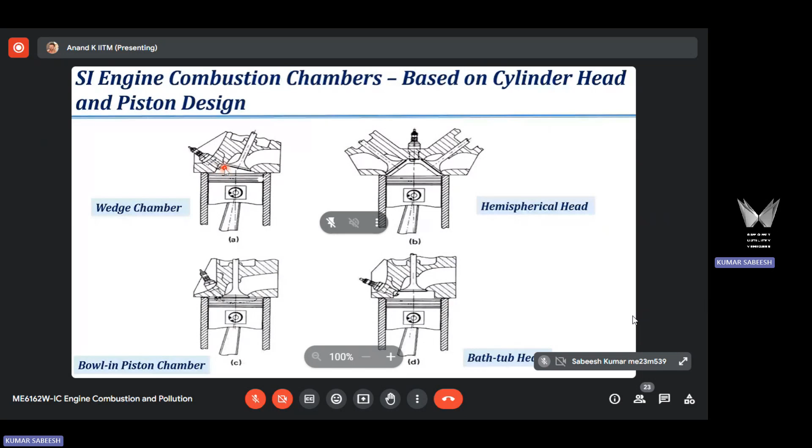Wedge-shaped combustion chamber with spark plug located at the center of the effective combustion space. Wedge-shaped combustion chamber, we already discussed in the combustion chamber types; that is one of the types based on the cylinder head shape. This is generally used in V-type engines. You see here that the spark plug is located at the effective combustion space, which is a space where the volume is more, so the flame has access to most of the charge in this region.

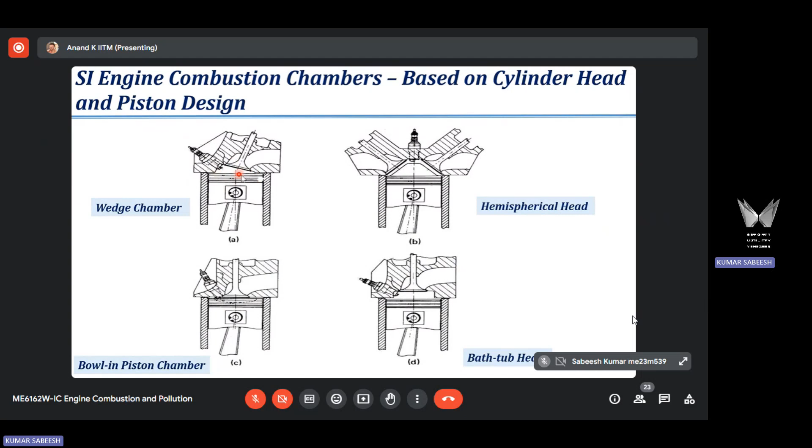And this is an end-gas region. So since the question is about knocking tendency, we should think about end-gas, whether this design will increase end-gas temperature or not, whether the flame will reach end-gas quickly or not. This is what you need to think to answer that question.

The second question is about arranging the following 4 types of combustion chambers in the increasing order of knock producing tendency. These 4 types of combustion chambers, as we know, are based on the location of the valves, intake and exhaust valve. Based on the change in the location of intake and exhaust valves, you have these 4 types of combustion chambers. You have to arrange them in the increasing order of knock producing tendency, meaning the one that produces least knock should come in the beginning, and the one that produces highest knock should come at the end.

The other 2 will come in between. So it is like increasing order of knock producing tendency. First make the arrangement and then justify your arrangement with valid reason, meaning you have to write the reasons why you have arranged so.

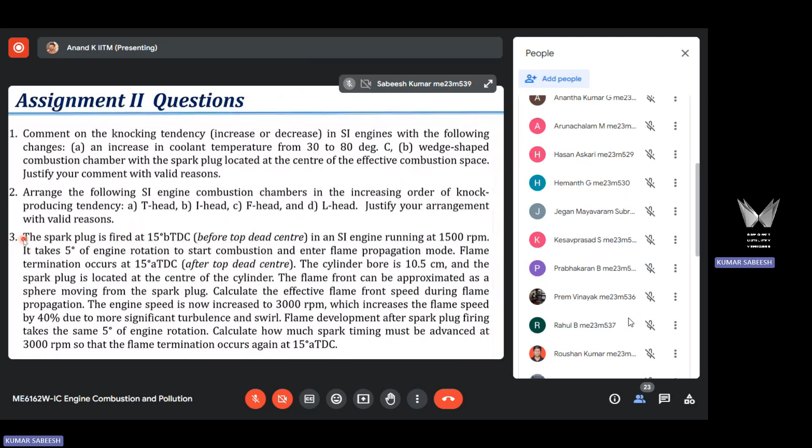Okay, thank you. So now we are moving to question number 3. There's a simple numerical problem. I'll first read the problem and then discuss the solution.

The spark plug is fired at 15 degree BTDC, before top dead center. Always note that when we do combustion analysis, compression TDC is a reference point. Piston reaches TDC two times in an engine cycle in a 4-stroke engine. Our analysis is with respect to piston at the TDC point during the end of compression stroke.

So here, spark plug is fired at 15 degree BTDC. What is this information? It's 15 degree before TDC, sir, like advance. So this information is the spark timing, right? Timing of spark discharge is given as 15 degree BTDC in an SI engine running at 1500 RPM.

This is the engine running speed. It takes 5 degree of engine rotation to start combustion. What is this information, 5 degree? The crank angle time, ignition delay. More precisely, what is that called as? First stage of combustion, right? What is that called as? Flame development phase, yes, flame development period.

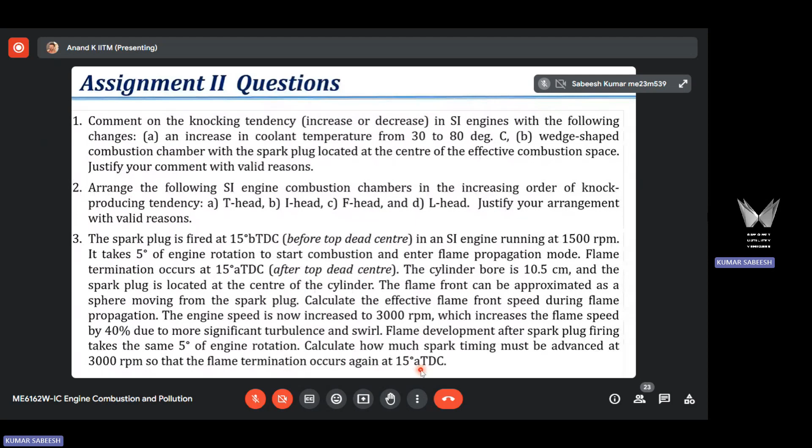So what I will do is write the data. The information given to you: let us consider case 1. Spark timing is equal to 15 degrees before top dead center. Engine running speed is given as 1500 RPM.

Flame development period is given, FDP, which I'm writing as flame development period. This is 5 degrees crank angle. Flame termination, abbreviated FT, flame termination time, is 15 degrees ATDC, which is after top dead center.

Cylinder bore is given, I'm writing it with capital D. Cylinder bore is 10.5 centimeters. Spark plug is at the center of the combustion chamber, so this is the axis, and the spark plug is located here.

It can be offset also in a given problem, but it is mentioned that the spark plug is at the effective center of the combustion chamber. So here the flame is developed, and from here it starts to move across the combustion chamber. The diameter or bore of the cylinder is given in the problem, and with this information, the flame front is approximated as a sphere moving from the spark plug location. With this information, you are asked to find the effective flame front speed.

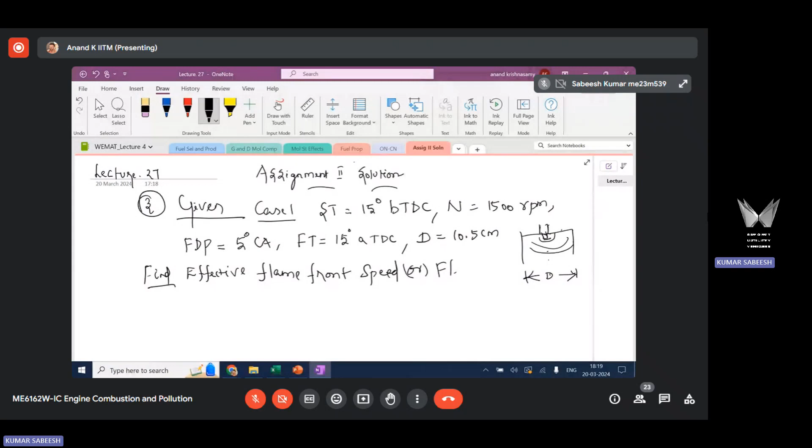So this is speed, or you can say flame velocity. We have already discussed that the overall combustion event in SI engine is based on how the flame moves, because the rate of burning is dependent on the rate at which the flame moves.

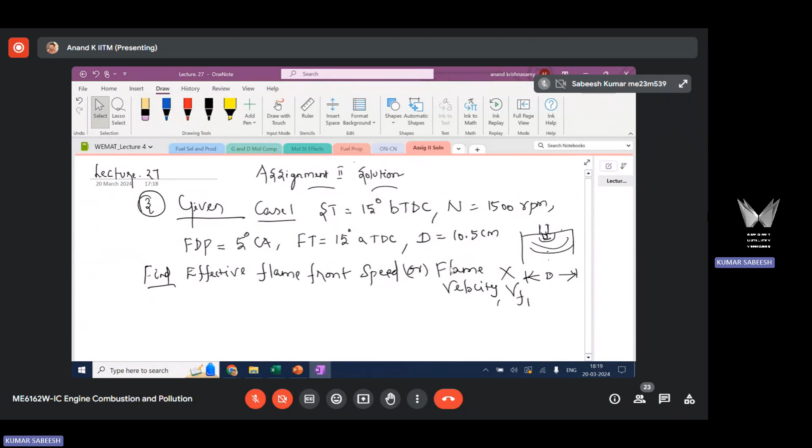Flame velocity carries a lot of significance in SI engine combustion. We need to find or track the velocity of the flame, because this is going to decide the rate of burning of the fuel-air mixture. Let us say this is VF1, which is what is asked in the problem. Now, to get velocity, go to the fundamental definition. What information do you need to get the velocity of the flame?

Slope of the curve, sir, in that way. No, go to the fundamental definition. Velocity, velocity, how will you define it? We need distance and time, sir.

Yes, so we need time from the crank angle, from the start of flame propagation to the end, and we also have the range. Exactly, so we need velocity, and we are going by the fundamental definition. What information do we need? Two pieces of information: one is distance traveled by the flame, and what is the maximum distance traveled during the flame propagation, and what is the associated time taken for traveling this distance? These two fundamental pieces of information I need to get this unknown flame velocity.

Now, how do I find the distance traveled by the flame? Based on the given information, what is the distance traveled? When the flame develops, it develops at the spark plug location. There is flame development here. It takes 5 degree crank angle time for developing the flame. Once it gets developed, it starts to propagate evenly across the combustion chamber.

Now what will be the maximum distance moved by the flame? The tangent of that sphere will be touching the piston top. So can I say that it is d by 2? It is moving evenly on both sides. So max distance will then be d by 2, right? Yes.

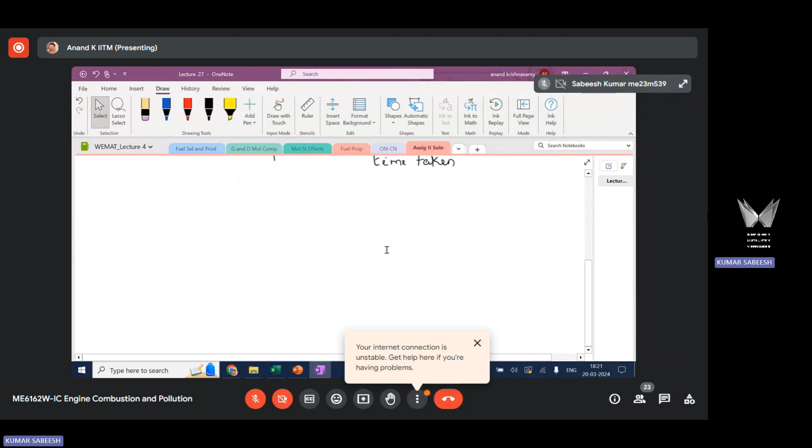So distance traveled is now known. How will you get the time taken? Please note that theta, the total angle, is given. This is the SI unit — we need flame speed, so we have to convert theta. This is in meters, time taken should be in seconds. And the given information is...

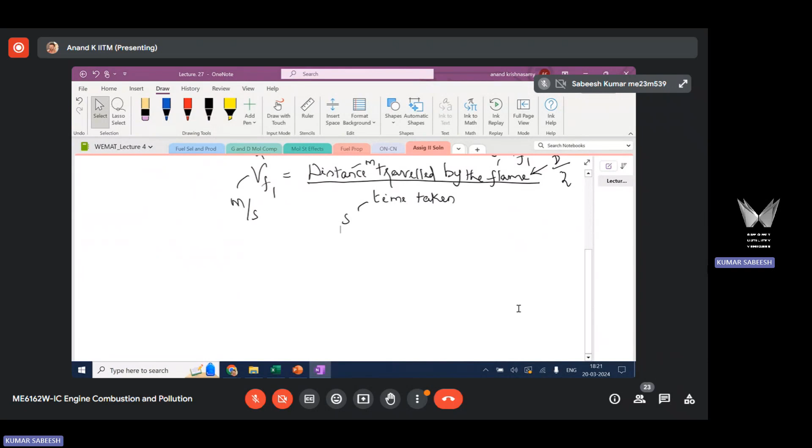Spark timing is known to me. Spark timing is 15 degrees. Reference point is 0 degree, which is compression TDC. This is before TDC, in this direction. If you move in this direction, it is before TDC; in this direction, it is after TDC. This is my reference point. Spark timing is 15 degree BTDC, before TDC.

It takes 5 degree to develop the flame. So this duration is 5 degree crank angle, the flame development period. So what will be this angle then? 10 degrees, sir — 10 degree. So this is 10 degree, where the flame propagation starts.

Now, when does the flame terminate? That is given in the problem. This is 15 degree after TDC, where the flame terminates. So this is the point of flame termination.

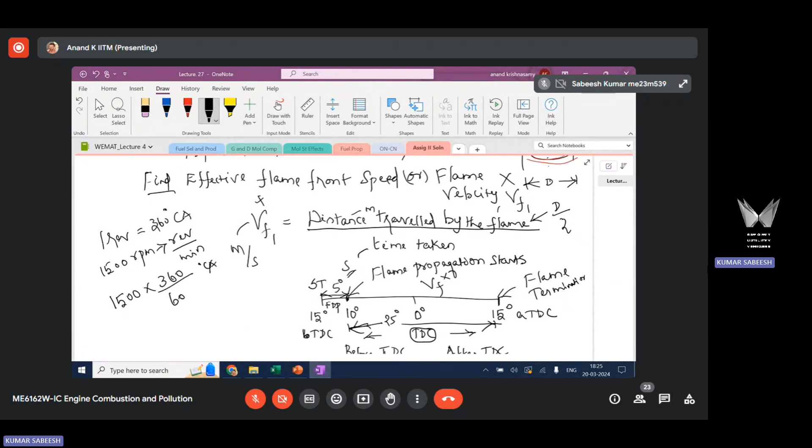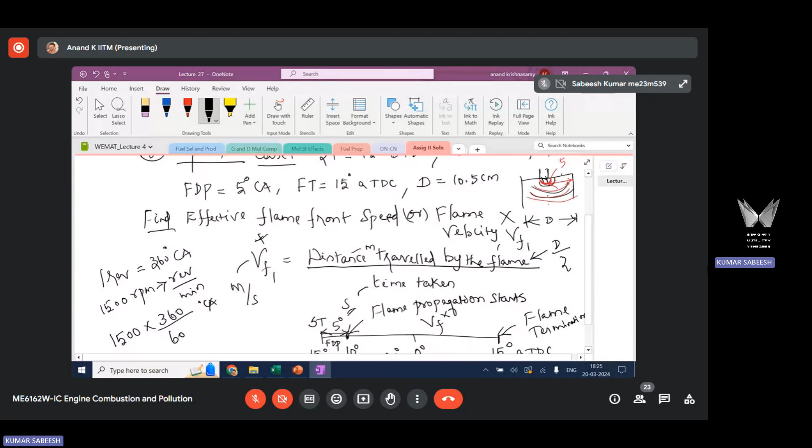Yes sir, so this is the total angle in 1 second. From this you can convert angle into time in seconds. So you need to do that conversion. Substitute here and you should be able to get VF1. This is for case 1. Case 2.

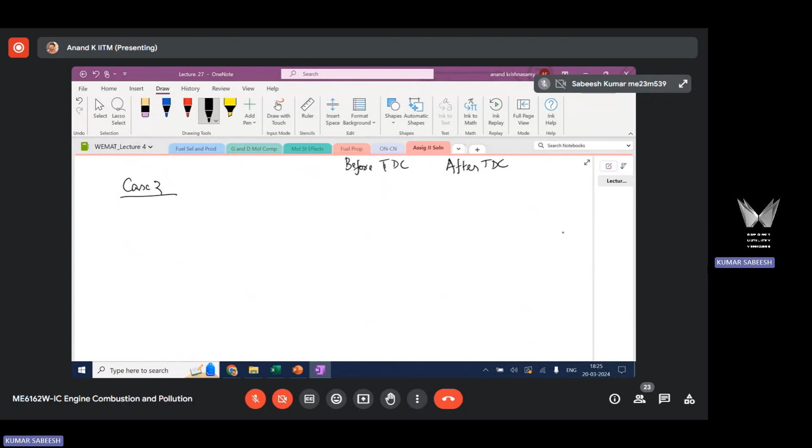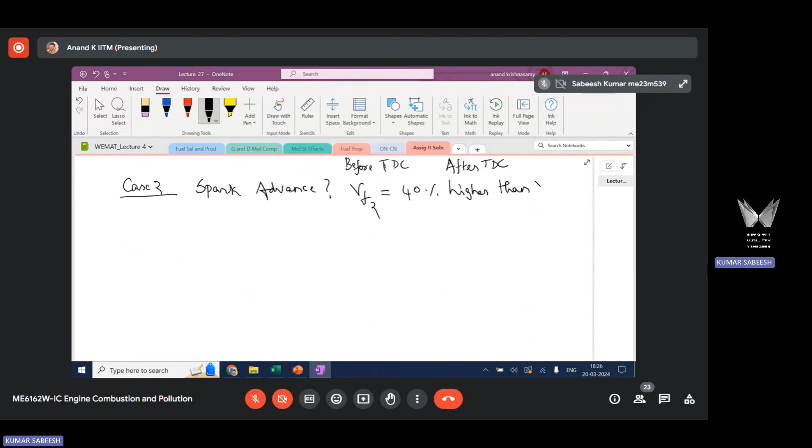Let us write the information given. For case 2, you are asked to find the spark advance. The information given is that flame velocity is 40% higher than VF1. What does that mean, 40% higher than VF1? It means 1.4 times VF1. So this is known to me now, since VF1 was obtained from the previous case.

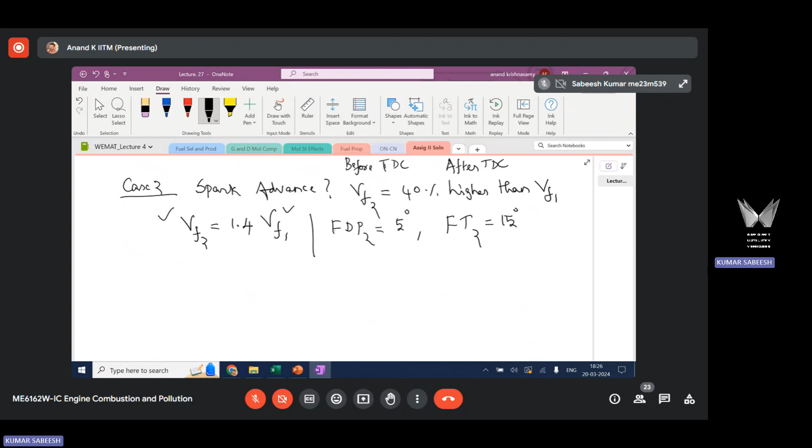Other information given is that it takes the same 5 degrees for flame development, same as the previous one. And the flame termination for case 2 is again at 15 degrees ATDC. So these are the informations given to me now.

So this is on the time bar. This is flame termination for case 2. This is 0 degree, which is TDC, and this is 15 degrees ATDC. The 5 degree flame development period is for case 2. What I don't know is the spark timing, ST, for case 2 - this is what I need to find. This is 5 degrees, known to me.

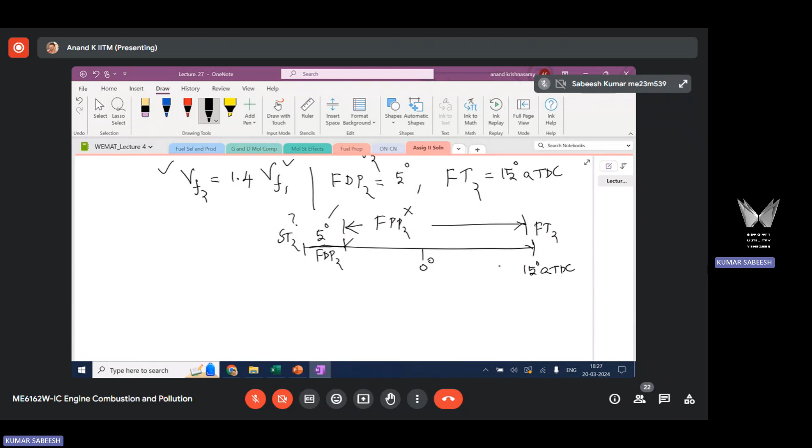Now the flame propagation starts here and ends here, so this period is the flame propagation period. Let us say this is FPP for case 2. Until you get this, you are not going to get the spark timing. How will you get the flame propagation period for case 2?

Sir, I have R, which is the maximum distance that is going to travel, and I've got the flame propagation velocity - this is known to me. This equals D by 2, which is not going to change, divided by time.

So this is known, this is known, you can get time in seconds. Did you get what I am saying? Right sir. Now you need to convert that into angle, into degree crank angle. Once you get this, this information will be known to you in degree crank angle.

Once you know this information, you can track this point, and add to that this 5 degrees. From that you will be able to get the spark timing for case 2, and compare that with case 1 to say how much the spark timing is advanced. Clear? Clear, sir.

Question number 4. In this question, you are asked to write and briefly explain any 2 engine variables that influence the premix combustion phase and the diffusion combustion phase in a CI engine.

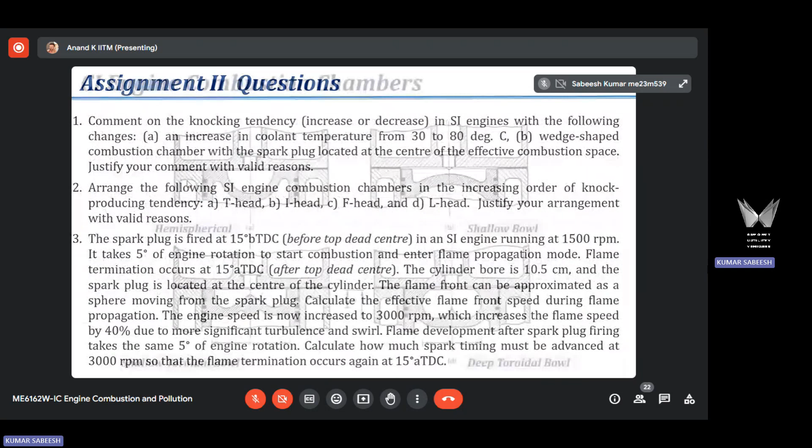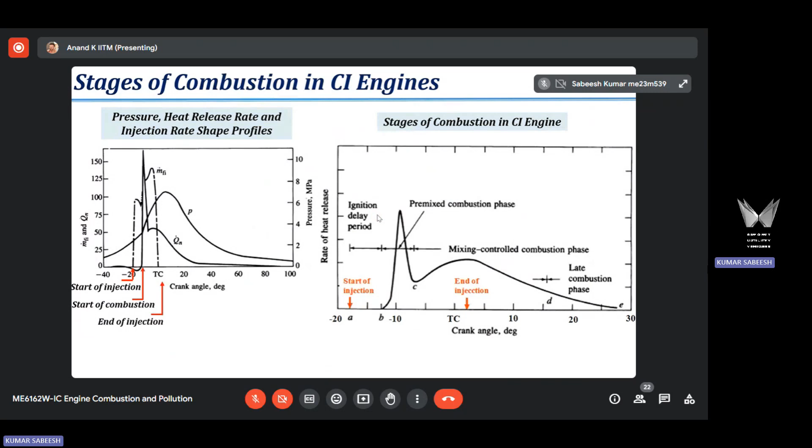The peak pressure will be different, sir. Peak pressure will be different. So this is a heat release profile for a CI engine. You are asked to draw this heat release rate profile for no load condition and full load condition. What will happen to the ignition delay time at no load and full load? Sir, ignition delay time will be more in the no load condition compared to the full load condition, because conditions are favorable for lesser delay time in the full load condition. Okay.

So you should first check what will happen to delay, which is the first stage of combustion - what will happen to delay time at no load and full load? These are the conditions given. So for no load, the duration of delay time depends on the in-cylinder pressure and temperature condition. What will be the pressure and temperature? Let us say this is P1 and T1, and this one is P2 and T2. In a relative sense, what will be the pressure and temperature value at no load and full load? P1, T1 will be lesser than P2, T2 - this will be less, this will be more.

This is no load, you burn less fuel, so in-cylinder pressure and temperature are lower. At full load, you burn more fuel, so in-cylinder pressure and temperature will be high. So in a relative sense, this pressure and temperature is taken at the time of fuel spray. When you spray fuel into the engine cylinder, the in-cylinder conditions we are taking as P, T. I'm talking about these conditions - I have indicated that as P1, T1 and P2, T2 at the time of fuel injection.

When in-cylinder pressure and temperature are higher, the delay time is going to be shorter. Overall delay time is physical delay plus chemical delay. Chemical delay is based on composition and is also sensitive to temperature. Physical delay is based on how quickly you get an ignitable mixture, and this depends on in-cylinder pressure and temperature conditions. When pressure and temperature are high, you get a shorter overall delay because there is a shorter premix, shorter physical delay, and shorter chemical delay. Overall delay time comes down when pressure and temperature are high.

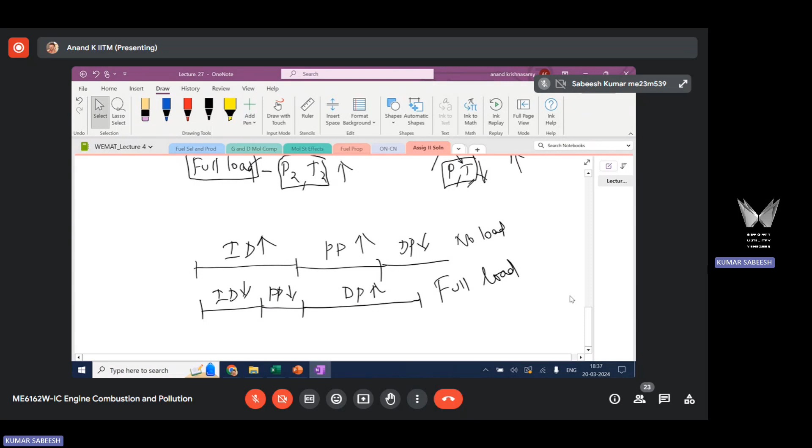So this is at no load, and this is at full load. Is it clear? Yes sir, clear sir, clear sir. Okay.

Question number 6: comment on the ignition delay increase or decrease in a typical CI engine with the following changes - fuel injection timing varied from 10 to 30 degree before top dead center, and piston bowl shape modified from flat geometry to deep toroidal. So there are two parts of this question. One is change in injection timing.

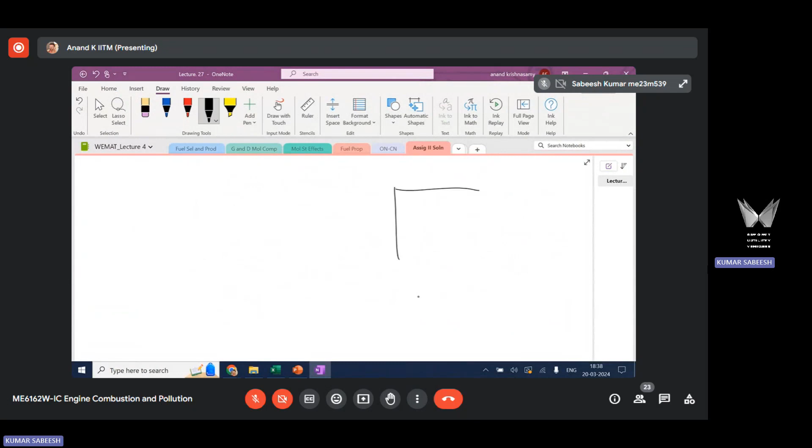So you have two different injection timings. One is 30 degree before TDC, let us say this is the TDC point. The other one is 10 degree before TDC. So you are injecting fuel at 30 degree instead of 10 degree. The question is about commenting on the ignition delay when the fuel injection timing is varied from 10 to 30 degree. If you move from 10 degree to 30 degree, what will happen to the ignition delay time? Will the delay time increase or decrease?

Again, this depends on in-cylinder conditions. So you have one condition here, let's say P2, T2, and this is the initial condition, let's say P1, T1. If you move from here to here, you should think about the in-cylinder conditions, and accordingly the delay time will increase or decrease.

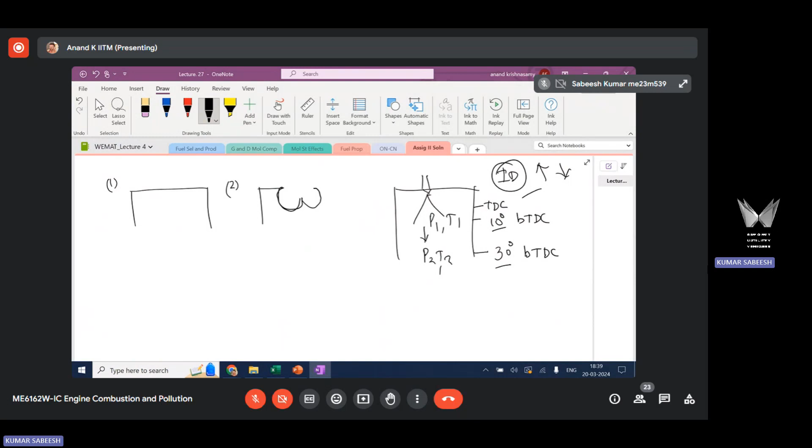The second part of the same question asks you to comment on ignition delay when the piston bowl shape is modified from flat geometry to deep toroidal geometry. So case 1, you have a flat piston like this. Case 2, you have a deep toroidal piston, which resembles the symbol omega.

This is flat, this is deep toroidal. You need to comment on what will happen to the ignition delay time because of the change in bowl shape from this to this. So what will change if you move from flat to deep toroidal? What effect will it have?

It will increase the turbulence and mixing. With the flat piston, you will generate some squish because of the piston's upward movement, but there is no swirl. In the second case, with the deep toroidal piston, you are going to create a squish and also a swirl because of the piston shape. So fuel-air mixing is going to be different in these two cases. Now you have to relate that with the ignition delay time - you have to comment on whether it will increase or decrease as you move from flat to deep toroidal.

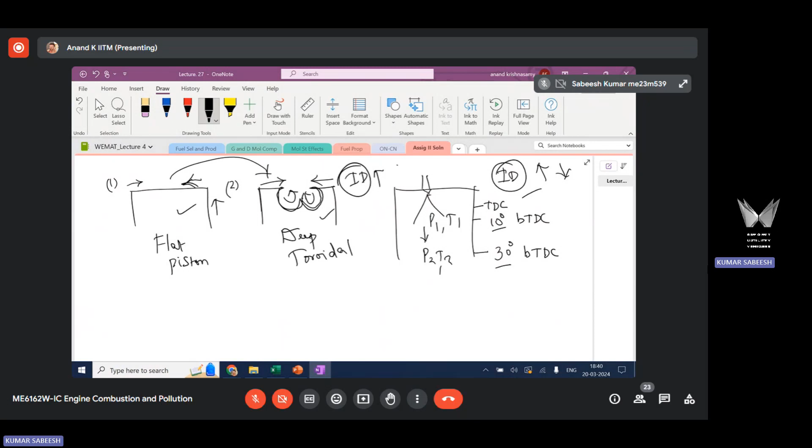The last question: arrange the following CI engine combustion chambers in the increasing order of squish producing tendency. Squish is a radial motion. You have 3 different combustion chambers: hemispherical, shallow bowl, and deep toroidal.

This is hemispherical, this is shallow bowl, this is deep toroidal. You have to arrange these 3 combustion chambers in the increasing order of squish producing tendency, meaning the one that produces least squish should come in the beginning, and the one that produces more intense squish should come at the end. You also have to comment on your arrangement, why you have arranged it like that. If you say a particular design increases squish, you have to justify why it increases squish.

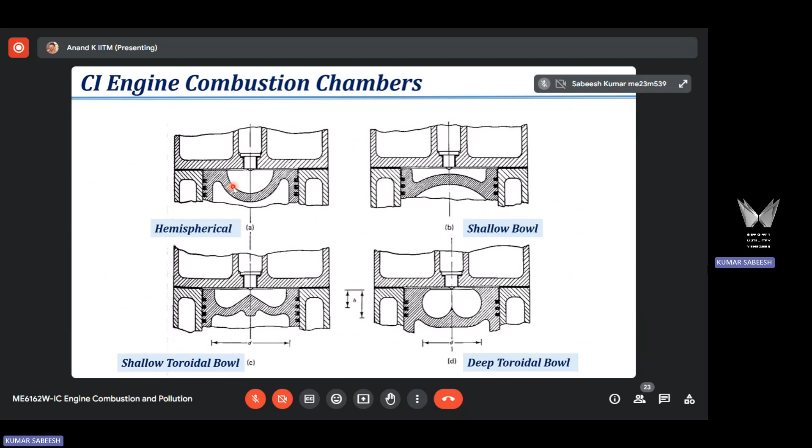Clear? Any questions? Are there any doubts? No sir, okay, there are no doubts, so I will move ahead. I assume that you got the solution key for this question.

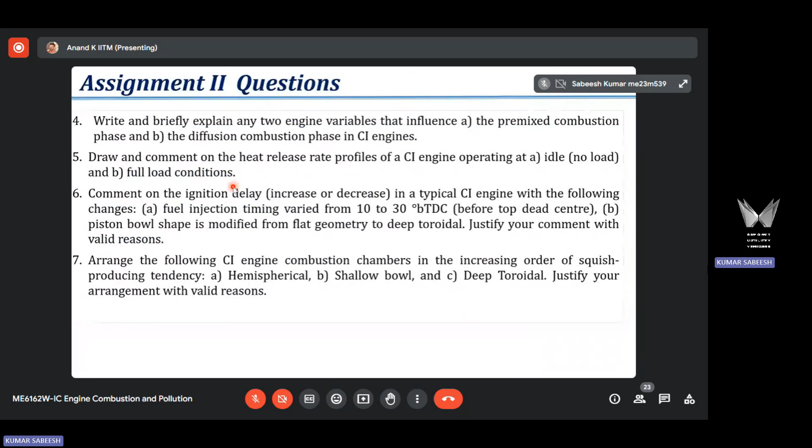Sir, just one question for quiz 2, the portion will be chapter 3 and 4, right? If I'm not wrong, what you have told. Only chapter 3? Quiz 2 you are asking? Quiz 2, yes sir. I didn't say anything about this. What I said is whatever we are going to discuss before the exam will be the syllabus for quiz 2. Right sir, thank you sir.

I think we should be able to complete chapter 4 also, maybe chapter 3 and 4, but I will just confirm. So your exam is on Saturday, right? Yes sir, this Saturday we have the exam. Ours is on 5th April, if I'm not wrong. That is next Saturday? No sir, 15 days after, 15 days. So I think we should be able to complete this. You may have to go through these 2 chapters. If there is any change, I will inform. I will confirm the syllabus anyway, well before the exam. Thank you sir.

So now we are moving to chapter 4. Chapter 3 on combustion is concluded. SI and CI engine combustion, we have now understood how the combustion event happens in a spark ignited engine and compression ignited engine. The next chapter is about instrumentation to study the combustion process in the engine. Having understood the combustion process, we need to know how to analyze this process in a given engine, SI or CI engine.

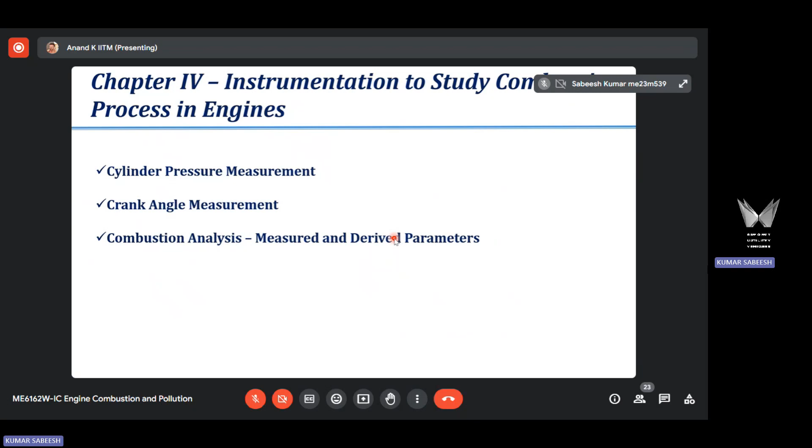So in this chapter, we are going to discuss the measurement principle followed to get the cylinder pressure, what instrument we use and what measurement principle is followed. Similarly, we will discuss what instrument we use to measure crank angle and what measurement principle is followed. With that information, I will also talk about how we can get other derived parameters by using this pressure and crank angle data. And that will help you analyze the combustion event in IC engine, both SI engine and CI engine.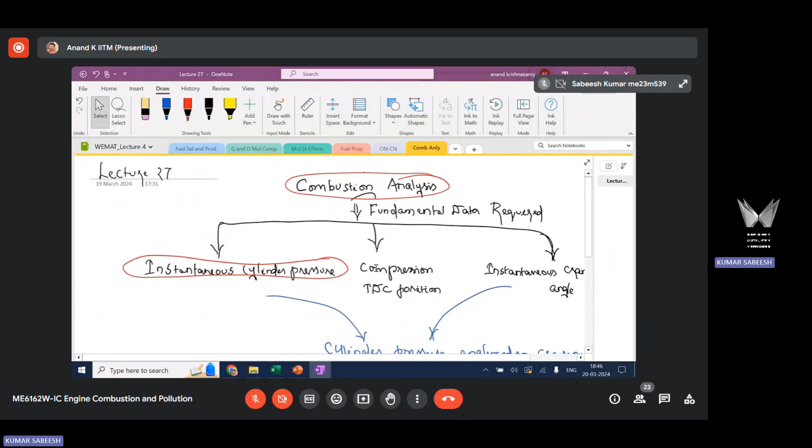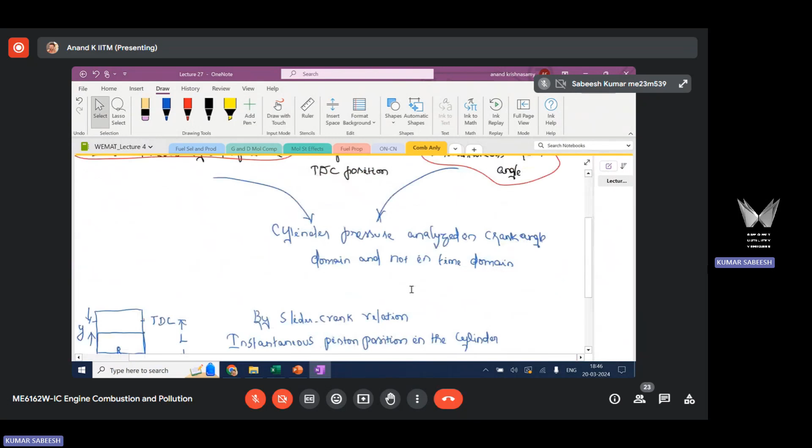The fundamental data required to analyze the combustion event is instantaneous cylinder pressure and instantaneous crank angle. What do we mean by instantaneous pressure and instantaneous angle? At that particular crank angle, at that time instant, we are talking about the pressure measured inside the cylinder, and the angle theta, which is the crankshaft angular position, measured at that same instant. This is instantaneous pressure and instantaneous angle.

Apart from this, you also need compression TDC position. When you say angle, you are counting that angle, and to count it you need a reference point. The reference point is always compression TDC position. Why compression TDC and not simply TDC? In a four-stroke cycle, the piston reaches TDC twice: once at the end of compression, and once at the end of exhaust. End of exhaust we are not bothered about, since combustion doesn't happen there. Combustion happens when the piston is at TDC at the end of compression, so that's why we take this as the reference point.

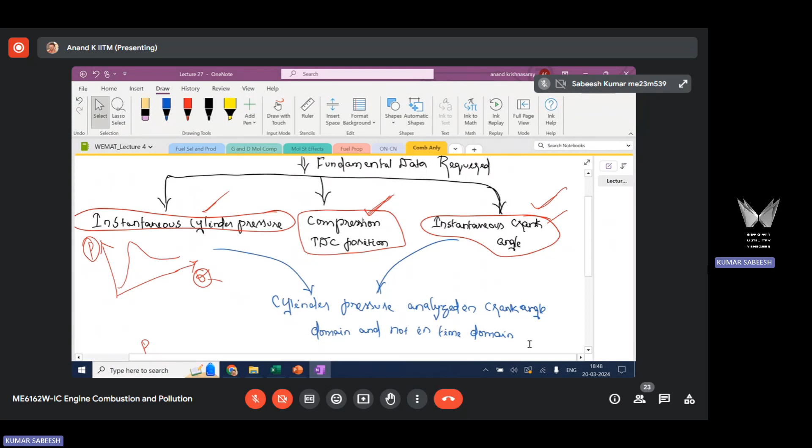So these three pieces of information you need to get precisely, and from this you obtain the pressure profile. This is one of the most useful and critical pieces of information needed to analyze the combustion event: instantaneous cylinder gas pressure, instantaneous angle, with this angle referenced with respect to compression TDC position. The other important point is that we analyze cylinder pressure in the crank angle domain, not in the time domain.

What do I mean by that? This is crank angle domain, and this is time domain, absolute time in absolute time units. We never analyze pressure variation with respect to absolute time, that is, time domain. We always analyze pressure variation with respect to crank angle variation. Why is it so? Because combustion is phased with respect to TDC, in an angle manner. So if the RPM increases, there is no relevance of time in that way — this becomes meaningless. If you analyze in-cylinder gas pressure variation in a time domain with respect to a particular time, this doesn't make any sense at all.

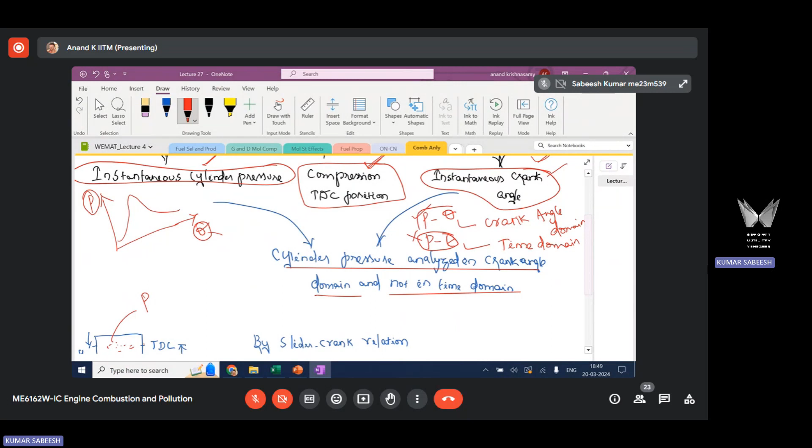This makes a lot of sense because when you analyze pressure with angle, this crankshaft angular position is related to the instantaneous piston position. These two are interrelated by the slider crank relation, because the engines we use are reciprocating engines, not rotary engines. IC engines, whatever we use currently, are not rotary. Rotary engines have very limited application — the Wankel engine is a rotary engine, but it has very limited application, it's a failure design.

This is what we use in a reciprocating engine: for any instantaneous crank angle, there is an associated piston position. The piston moves in linear up and down motion, and the crank undergoes rotational motion. These two are related through the slider crank relation. Meaning, if I relate pressure with angle, this angle can be related to piston position — linear piston position. So I am analyzing how the gas pressure varies in the cylinder with respect to the position of the piston. When I analyze in the P-theta domain, I am analyzing how pressure varies with respect to piston position, which gives me information about the piston position.

So when I say the pressure value is this much, this is related to the piston position. This makes a lot of sense because, ideally, at the start of the expansion stroke we want maximum pressure in the cylinder so that we can extract maximum work from the gas. Expansion stroke is the only stroke where work is done by the gas — it's positive work. During the rest of the time, the piston provides work to the working fluid, which is negative work. Only during expansion is it positive work. So we are analyzing pressure variation with respect to piston position.

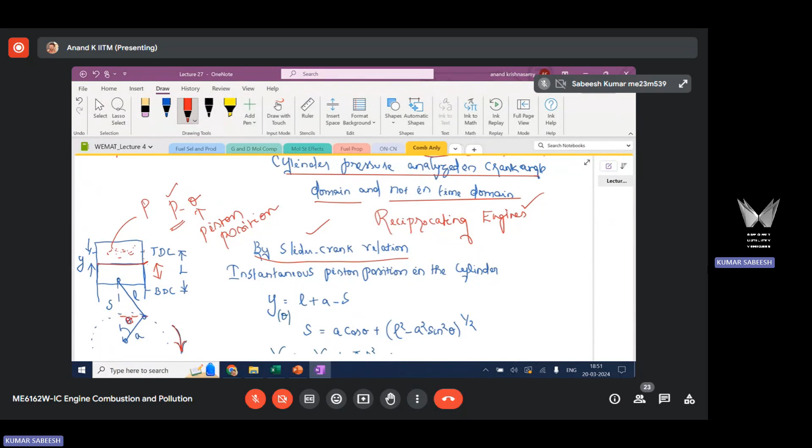This makes a lot of sense, and with theta, crankshaft angular position, you can always relate that to the linear position of the piston by the slider crank relation shown here. Y theta, the instantaneous piston position, is equal to L plus A minus S. L is the length of the connecting rod, and A is the crank arm length.

A is this, this is L, and this is S. S is the distance from here to here. This is L, connecting rod length, and A is the crank arm length. Y theta is any position, any linear or instantaneous position of the piston, that can be obtained from L plus A minus S.

What will be the value of S when the piston is at TDC? At TDC, S will be L plus A, so Y theta will be zero. When the piston starts to move down, it cannot move up, that is a dead center. When it starts moving down from TDC, S will decrease from L plus A.

The decrease in S from L plus A is a measure of Y, the instantaneous piston position. So this relation relates the linear position of the piston with respect to S, and S can be related to angle, crankshaft angle. This distance from here to here, S, can be obtained from this triangle. This distance will be the summation of this and this.

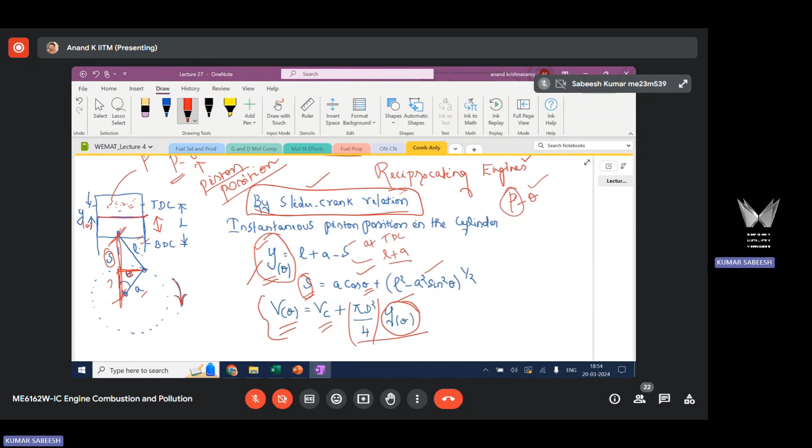So the fundamental data you need to acquire are cylinder pressure at any point of time in the angle domain, instantaneous angle, and compression TDC. With this information, you'll be able to get this profile. Once you get the profile, you'll be able to derive all other combustion parameters from this information. I will talk about that in the next class. First, I will talk about how we can get pressure measurement done and instantaneous angle measurement done, and how we can get compression TDC. After that, I will talk about how we can derive other parameters from the pressure profile.

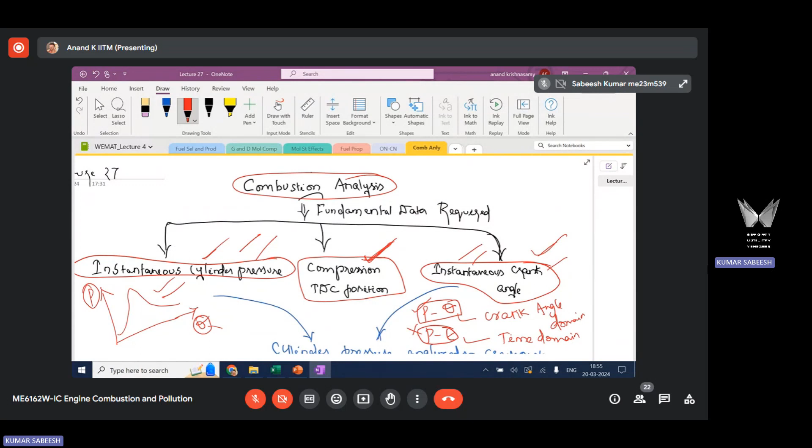Okay, regarding the assignment that you have told us to submit by 1st of April, yes, the theoretical question that has been asked, basically, as you have been saying, conceptual lines which are the gist of thoughts that we are willing to express, that is more than enough, no vast answer and something like that.

Yeah, descriptive answers are not required for exam as well as for assignment. You can make it very brief. What I will check is whether you understood the concept or not. You can convey that in a very brief manner.